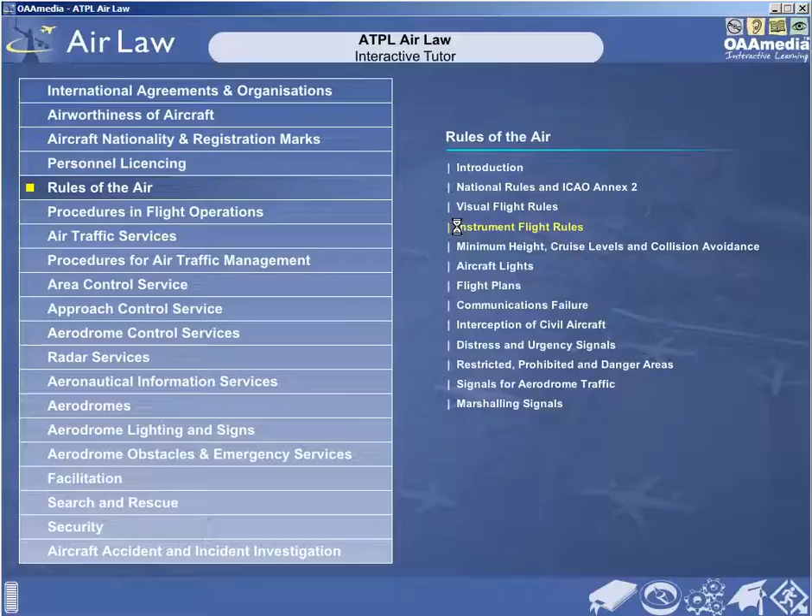In this lesson, you will learn about the instrument flight rules.

Expressed simply, the instrument flight rules, commonly referred to as IFR, are a set of rules for flights during which it cannot be assumed that pilots will be able to navigate their aircraft or maintain separation from obstacles, terrain, and other aircraft by reference to features outside the cockpit.

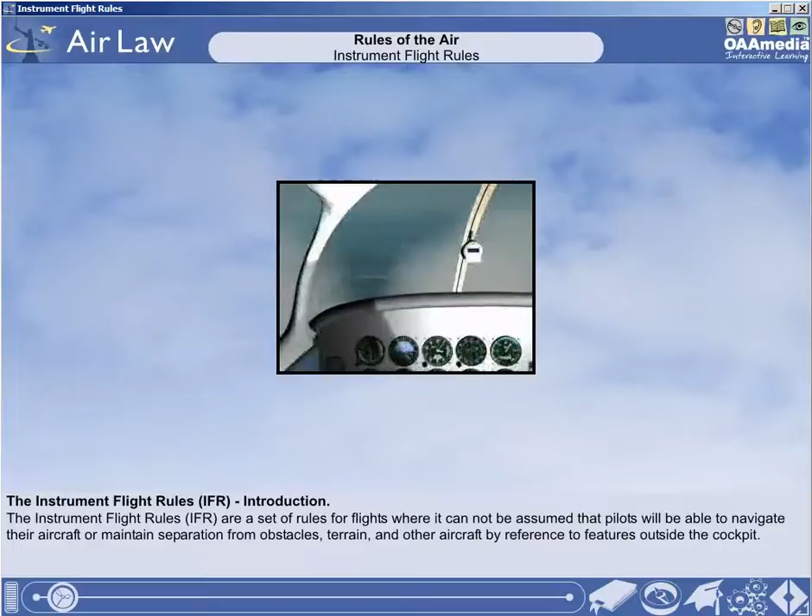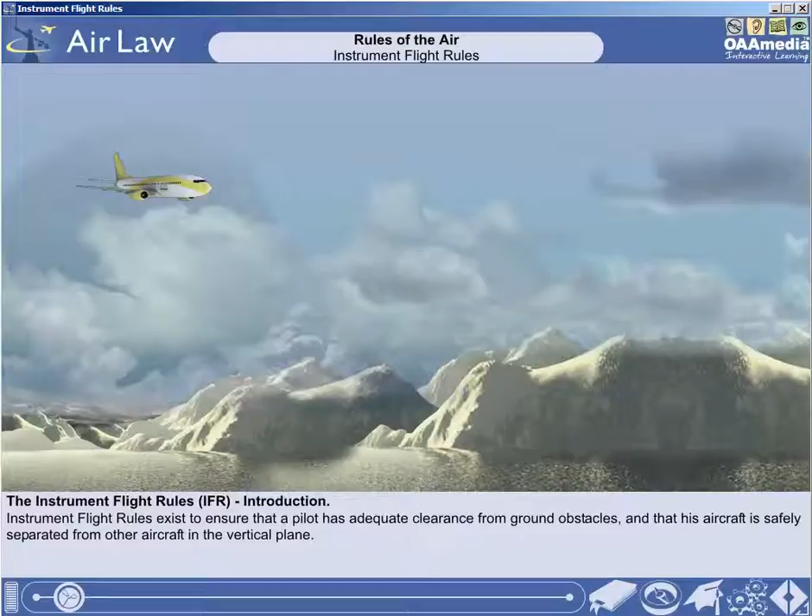So, in general terms, instrument flight rules exist to ensure that a pilot has adequate clearance from ground obstacles and that his aircraft is safely separated from other aircraft in the vertical plane.

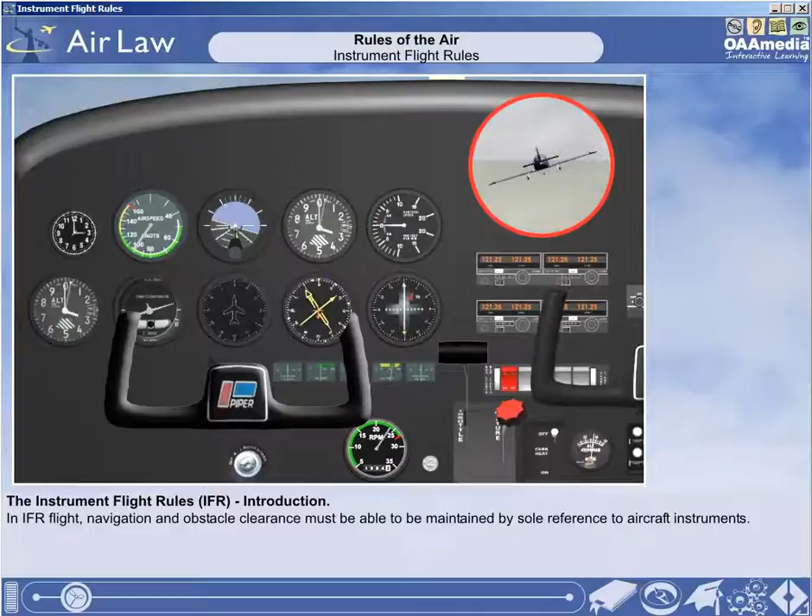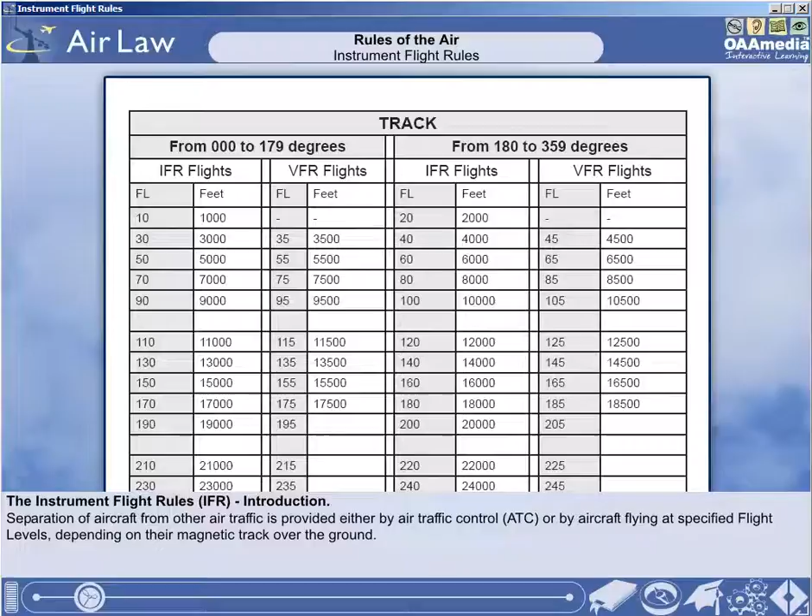For flight in accordance with the instrument flight rules, navigation and obstacle clearance must be able to be maintained by sole reference to the aircraft's instruments. Under the instrument flight rules, separation of aircraft from other air traffic is provided either by pilots receiving an air traffic control service, or by aircraft flying at specified flight levels depending on their magnetic track over the ground.

You should note that whereas all flights which take place in instrument meteorological conditions must be conducted in accordance with the instrument flight rules, flight under the instrument flight rules may also take place in visual meteorological conditions. Instrument flight rules are, as their name makes clear, a set of rules governing the conduct of an aircraft in flight. The instrument flight rules are quite independent of the prevailing meteorological conditions.

So even though the instrument flight rules assume that separation from terrain and other aircraft cannot be maintained by reference to features outside the cockpit, and that the aircraft is being operated by sole reference to its instruments, the instrument flight rules may still be followed or imposed even in visual meteorological conditions.

In fact, most commercial air transport flights within Europe and the United States are under continuous air traffic control, and therefore operate within controlled airspace under instrument flight rules for the whole flight, irrespective of whether visual meteorological conditions or instrument meteorological conditions prevail.

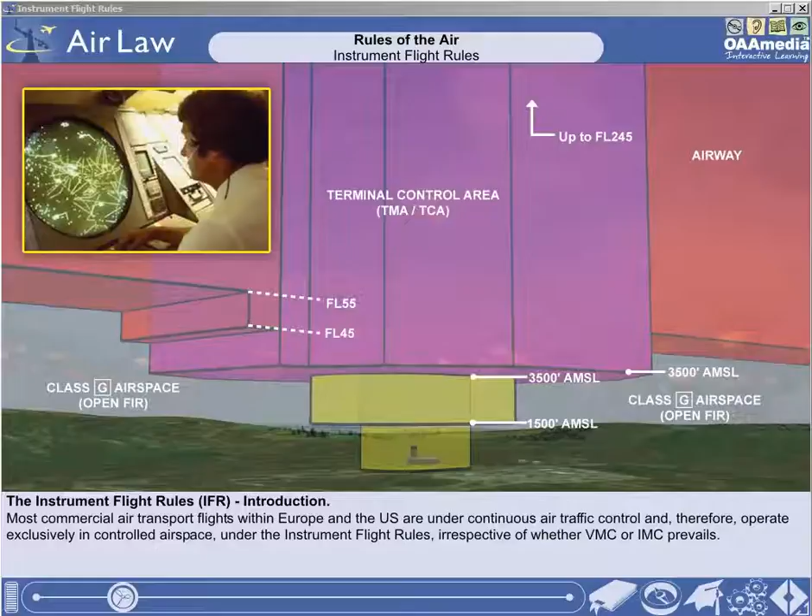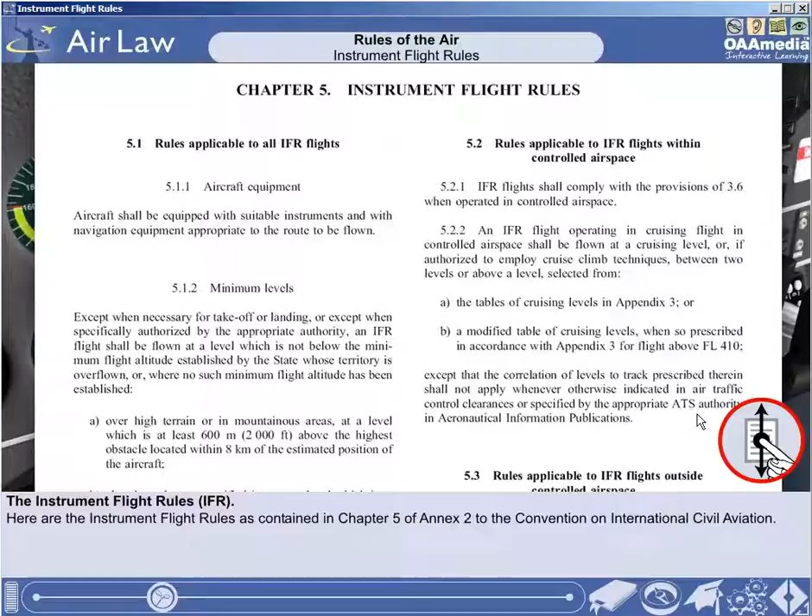Now that you have learnt about the concept of instrument flight rules, let's pass on to the rules themselves. Here they are, as contained in Chapter 5 of Annex 2 to the Convention on International Civil Aviation.

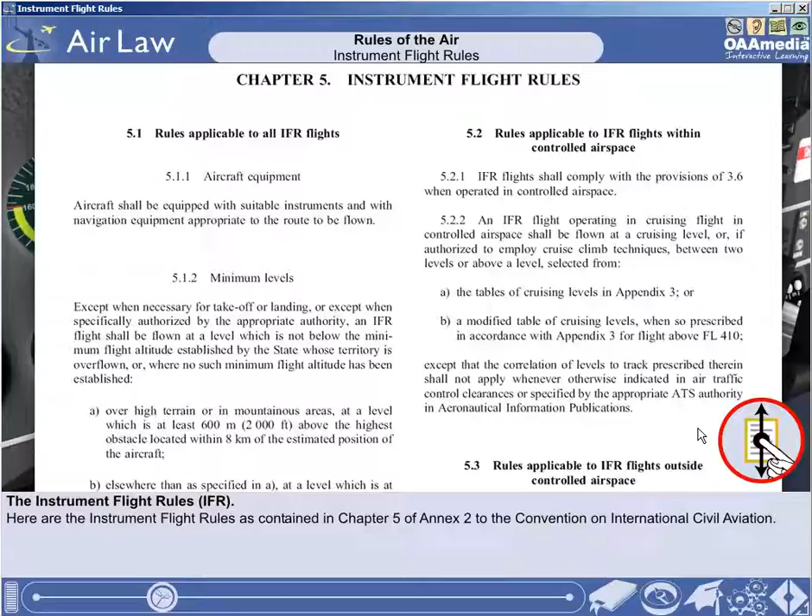Scroll through the instrument flight rules and note that they take up scarcely more than one page. When referring to Annex 2 for operational or examination purposes, always ensure that you consult the very latest version of the Annex.

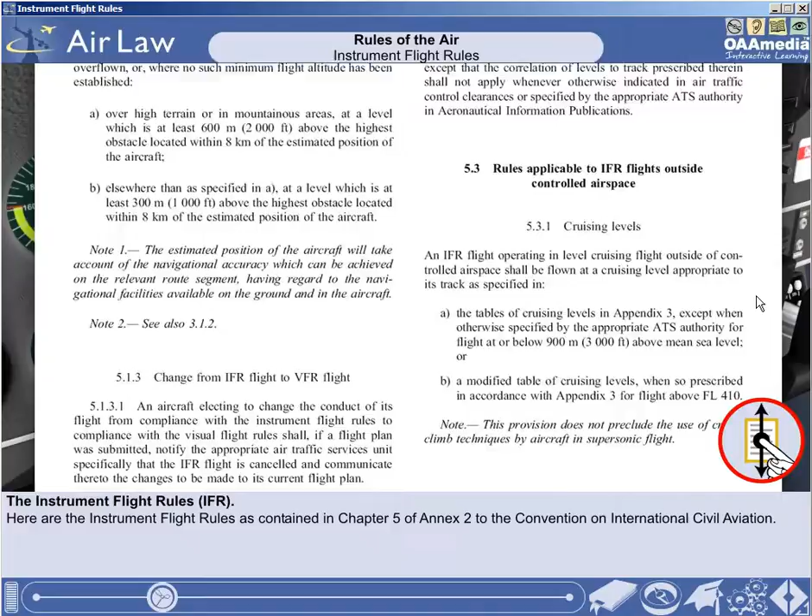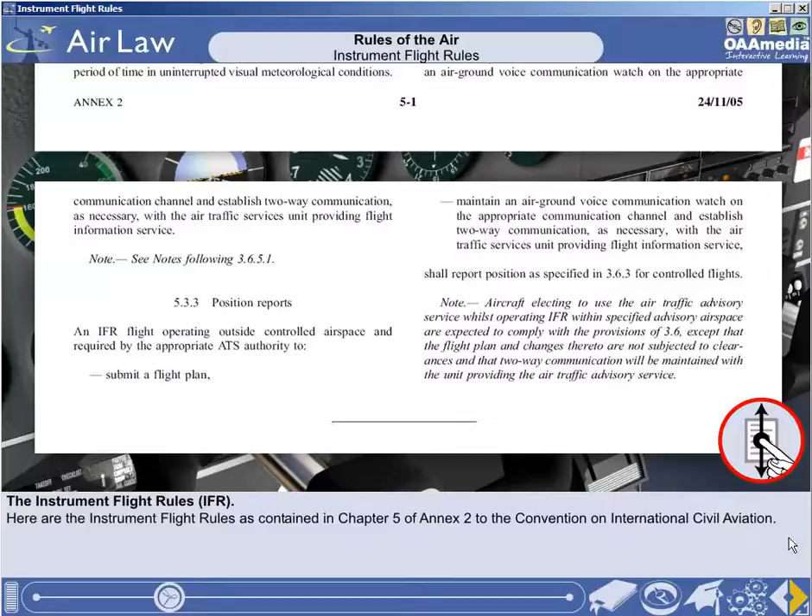In order to be able to fly in accordance with the instrument flight rules, aircraft must be equipped with suitable instruments and with navigation equipment appropriate to the route to be flown.

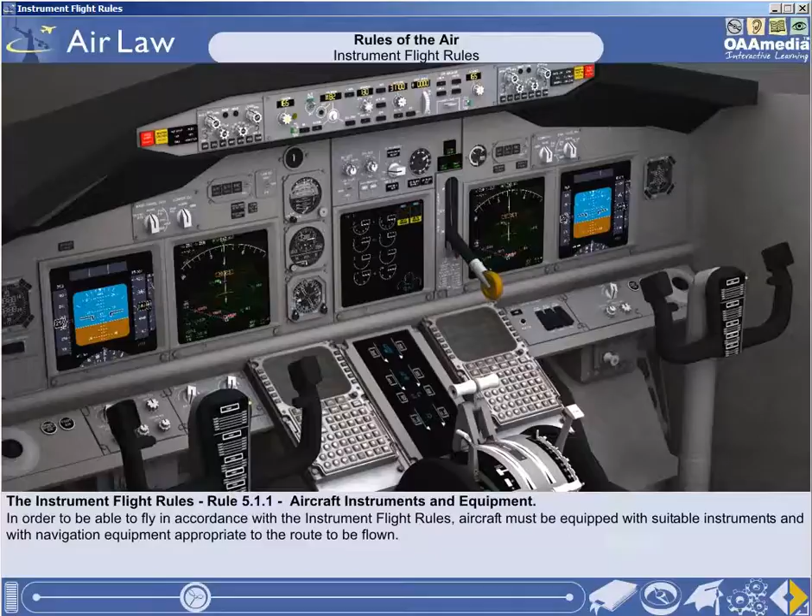Flight in accordance with the instrument flight rules must not be conducted at a level which is below the minimum flight altitude for IFR flight established by the nation whose territory is being overflown. Where a nation has not established a minimum IFR flight altitude, the ICAO minimum level rules apply.

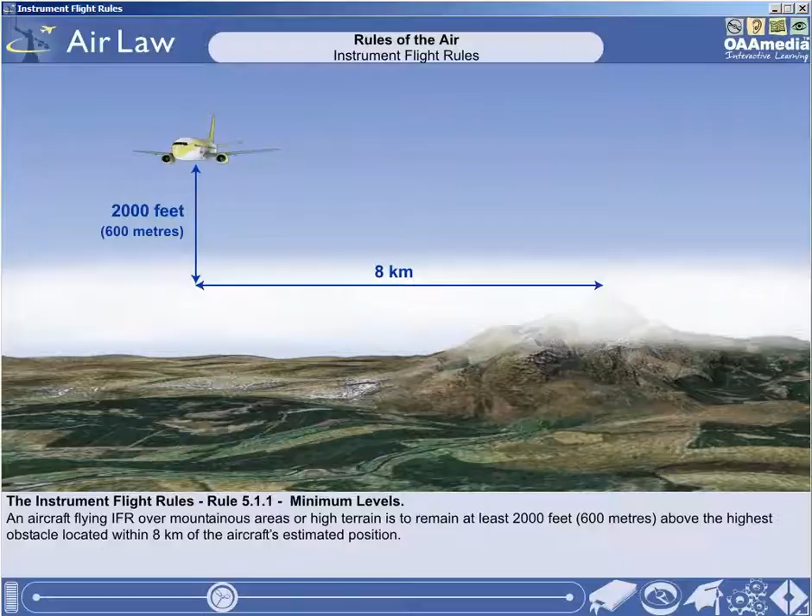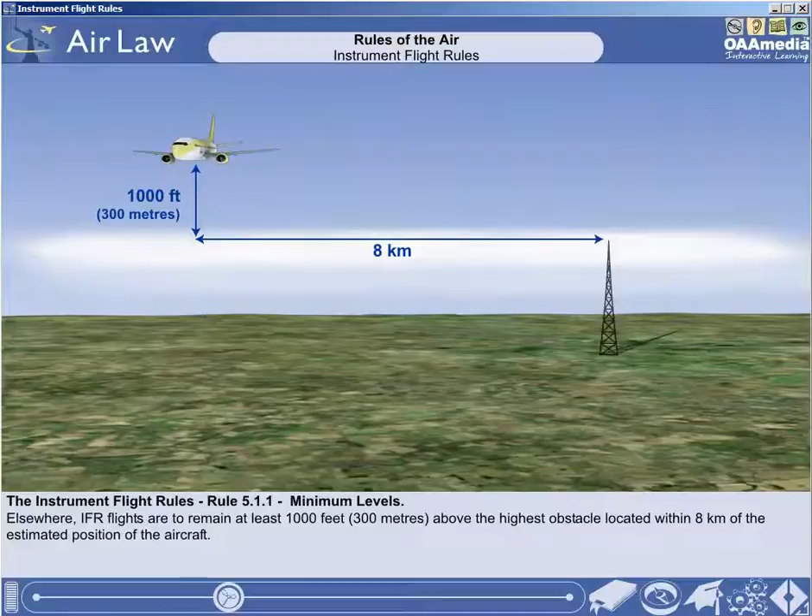These are that an aircraft flying in accordance with the instrument flight rules over mountainous areas or high terrain is to remain at least 2,000 feet or 600 meters above the highest obstacle located within 8 kilometers of the estimated position of the aircraft. Elsewhere than over high terrain or mountainous areas, IFR flights are to remain at least 1,000 feet or 300 meters above the highest obstacle located within 8 kilometers of the estimated position of the aircraft.

For the purpose of adhering to the IFR minimum level rules, the estimated position of the aircraft must take account of the navigational accuracy which can be achieved on the relevant route segment, having regard to the navigational facilities available in the aircraft and on the ground.

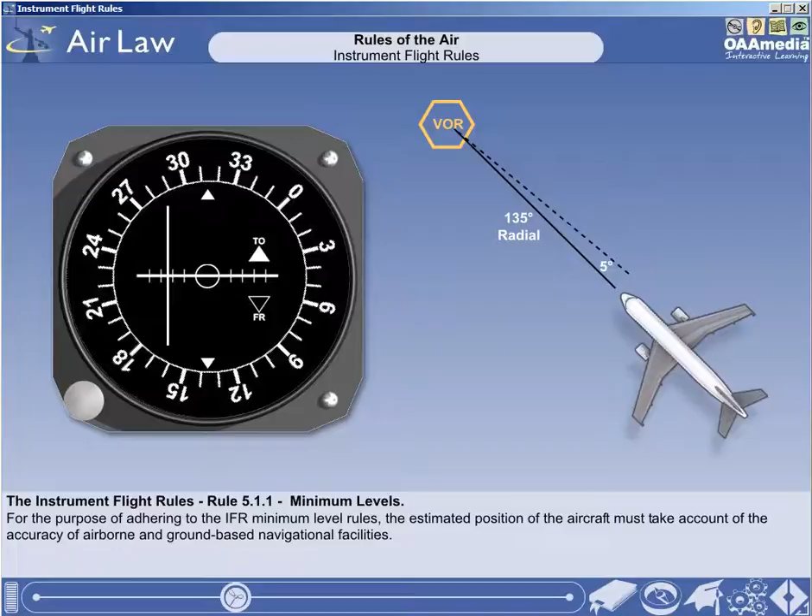Pilots should note that IFR minimum level rules do not absolve them from the necessity to adhere at all times to the overall minimum height rule, which stipulates that an aircraft must not be flown over congested areas or over an open-air assembly of persons below a height that, in the event of an emergency arising, would enable the aircraft to make a landing without undue hazard to persons or property on the surface.

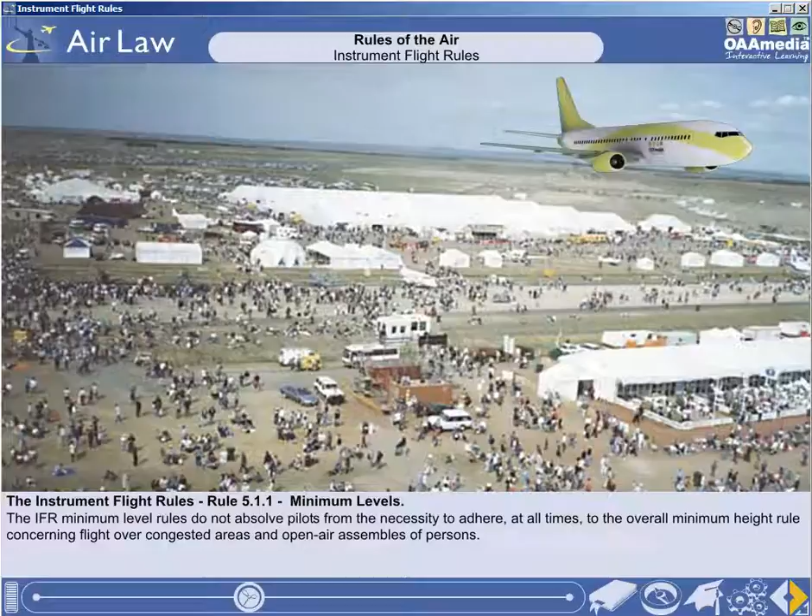The only exceptions to all the minimum level rules just mentioned are when an aircraft is taking off or landing, or when specifically authorized to descend below the established minimum levels by the appropriate authority.

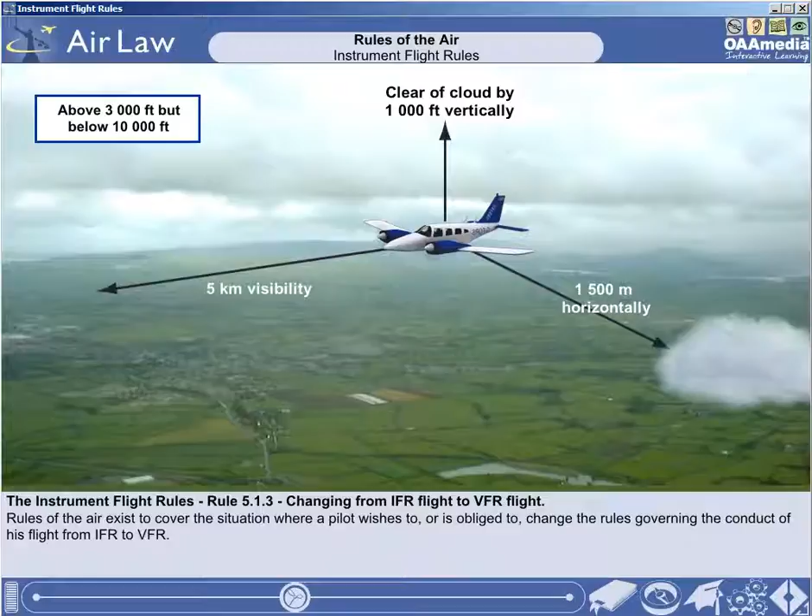In the lesson on the visual flight rules, you learnt about the rules governing the procedure for changing from VFR flight to IFR flight. You will not be surprised to learn that similar rules exist to cover the situation where a pilot wishes to, or is obliged to, change from the instrument flight rules to the visual flight rules.

If he has submitted a flight plan, a pilot who elects to change the conduct of his flight from compliance with the instrument flight rules to compliance with the visual flight rules must tell the appropriate air traffic services unit that the IFR flight plan is cancelled, and communicate to that unit the changes to be made to the existing flight plan.

When the pilot of an aircraft operating under the instrument flight rules wishes to cancel his IFR flight plan because he has encountered visual meteorological conditions, he must not cancel the IFR flight plan unless he anticipates and intends that the flight will be continued for a reasonable period of time in uninterrupted visual meteorological conditions.

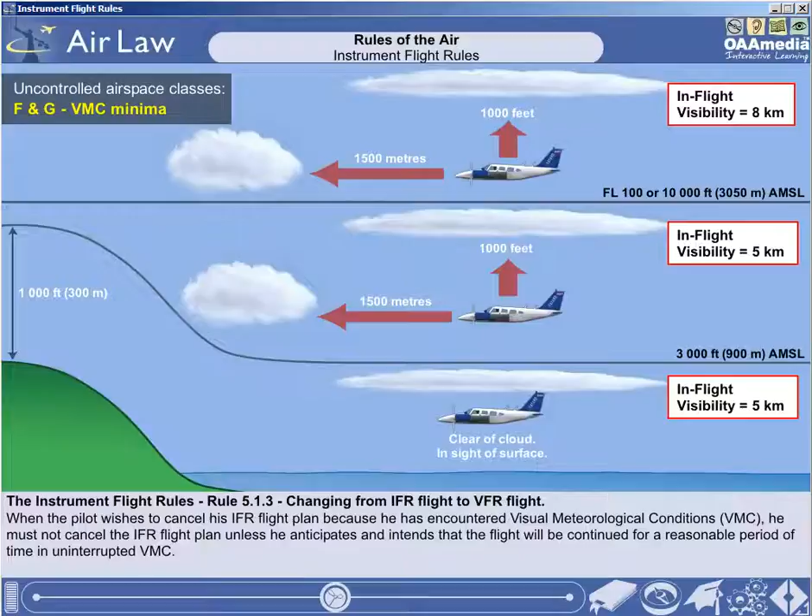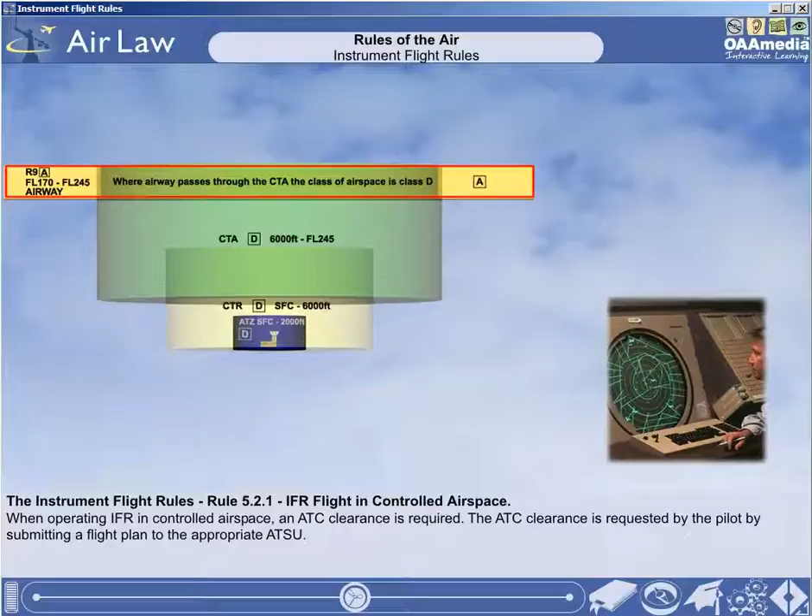When operating in accordance with the instrument flight rules in controlled airspace, the IFR flight is known as a controlled flight, and an air traffic control clearance is required for the flight to take place. The required clearance is requested by the pilot by submitting a flight plan to the appropriate air traffic services unit. When operating in controlled airspace, IFR flights must comply with air traffic control instructions and with all the sections of Rule of the Air 3.6.

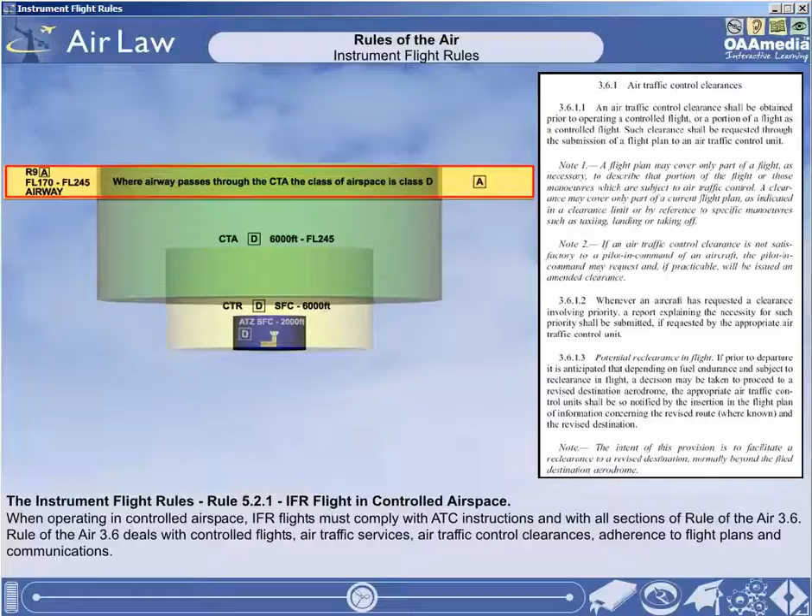Rule of the Air 3.6 deals with controlled flights, air traffic services, air traffic control clearances, adherence to flight plans, and communications. Rule of the Air 3.6 is covered by separate lessons in this CBT course.

Unless otherwise instructed by air traffic control or approved in an ATC clearance, when an aircraft operating in accordance with the instrument flight rules is in cruising flight within controlled airspace, the aircraft is to be flown at a cruising flight level dependent on the aircraft's magnetic track over the ground. An indication of the correlation between cruising flight levels and magnetic track for IFR flight is shown on screen here.

Note that different cruising flight levels are allocated for IFR and VFR flights. The rule governing the correlation between cruising levels and magnetic track is semicircular in nature, because approximately half of the allocated flight levels are for aircraft in the cruise on magnetic tracks from 0 degrees to 179 degrees, while the remaining allocated flight levels are for aircraft in the cruise on magnetic tracks from 180 degrees to 359 degrees.

The semicircular nature of this rule is illustrated here. You can see that from 0 to 179 degrees, IFR cruising levels are at odd-numbered flight levels, while from 180 to 359 degrees, the IFR cruising levels are even-numbered flight levels.

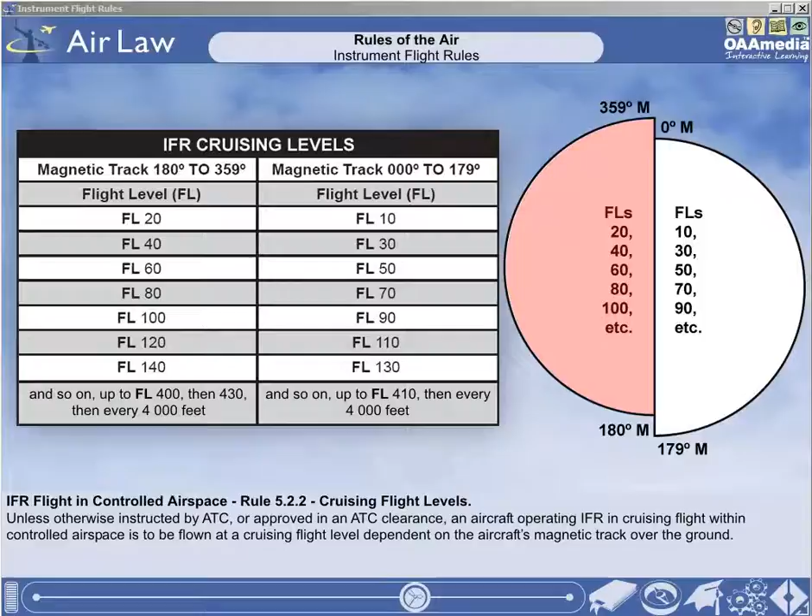If an aircraft is authorized to employ cruise climb techniques between flight levels, the higher flight level at which the aircraft levels off must also be in compliance with this so-called semicircular rule.

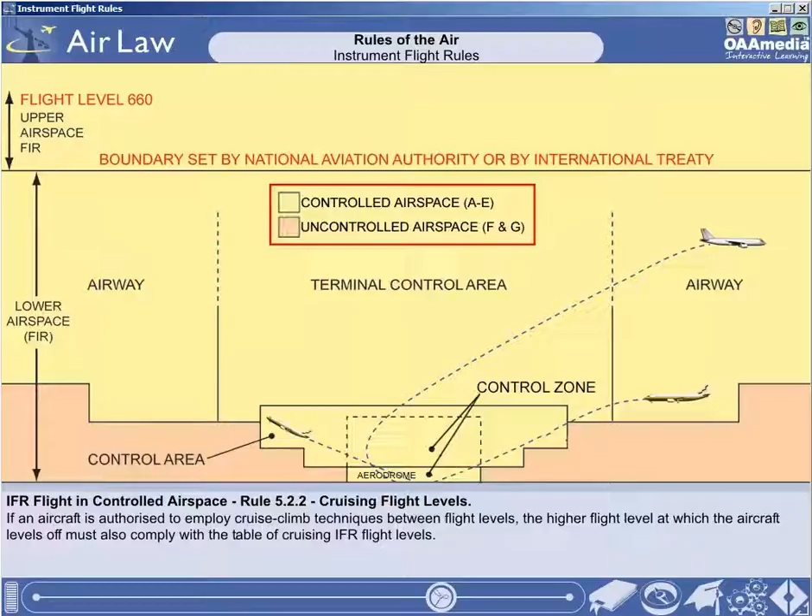The cruising levels that we have just illustrated are to give you merely an idea of the full table of cruising levels. That table is contained at Appendix 3 to Annex 2 of the ICAO Convention on International Civil Aviation. Be sure to refer to Annex 2 in order to study the details of this rule.

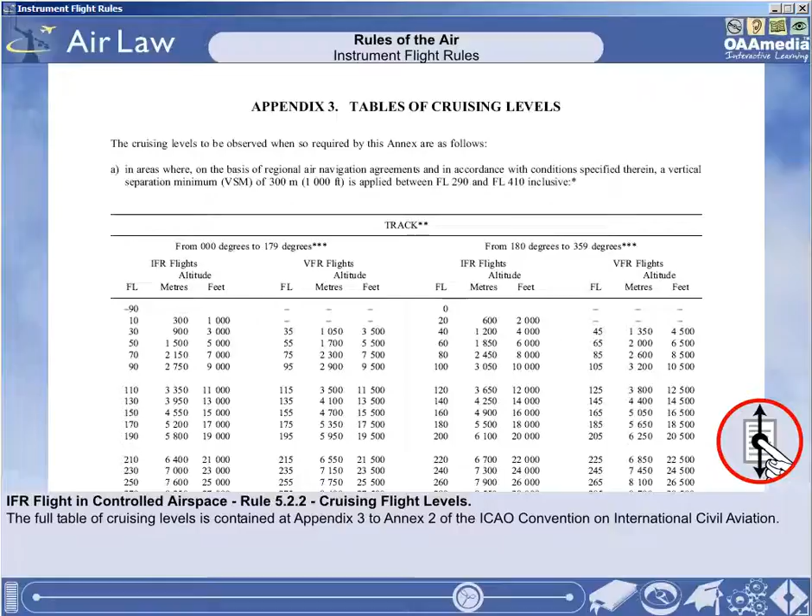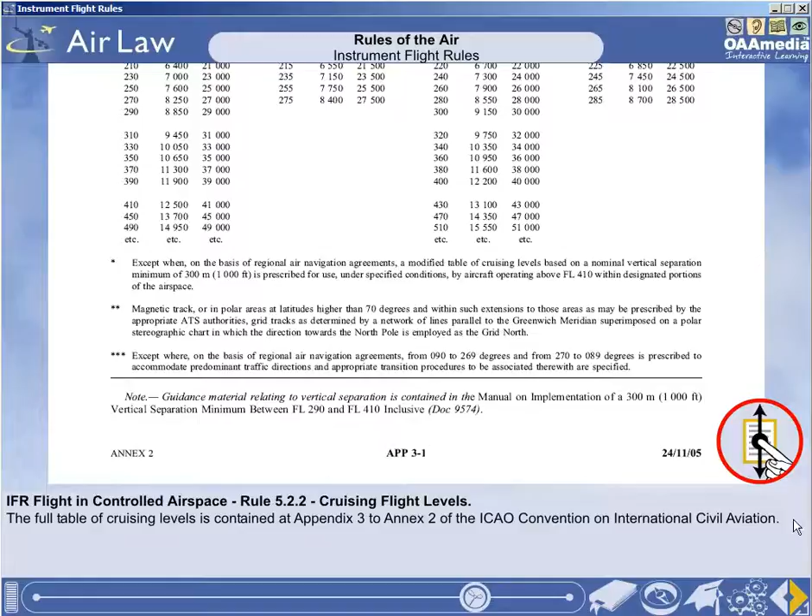The cruising flight level rule that you have just learnt about also applies to IFR flights operating in uncontrolled airspace, except when otherwise specified by the appropriate Air Traffic Services Authority for flight at or below 3,000 feet above mean sea level.

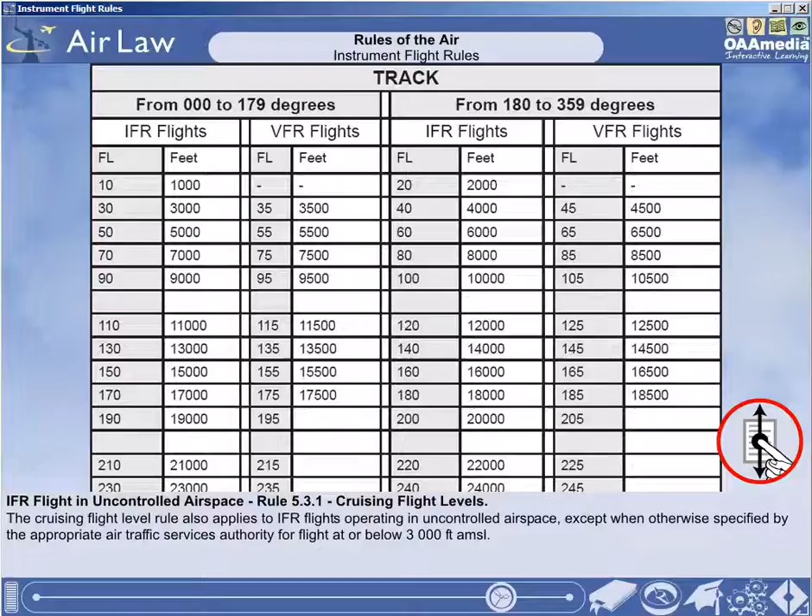An aircraft operating in accordance with the instrument flight rules outside controlled airspace is not always obliged to maintain an air-ground voice communication watch with an air traffic services unit.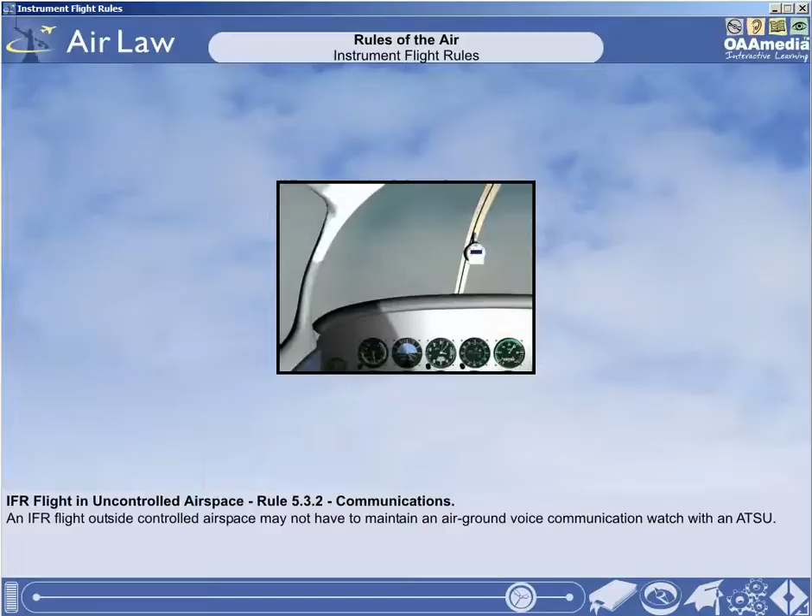However, if outside controlled airspace, but within advisory airspace, or when otherwise so required by the appropriate Air Traffic Services Authority, an IFR flight is to maintain an air-ground voice communication watch on the appropriate communication channel and establish two-way communication as necessary with the Air Traffic Services Unit. This situation is amplified by the rules of the air shown on screen here.

The pilot of an IFR flight operating outside controlled airspace, but who is required by the appropriate Air Traffic Services Authority to submit a flight plan and to maintain an air-ground voice communication watch with an Air Traffic Services Unit, for instance, an IFR flight within advisory airspace, is required to report his position as specified in Rule of the Air 3.6.3, applicable to controlled flights. That completes the lesson on the instrument flight rules.